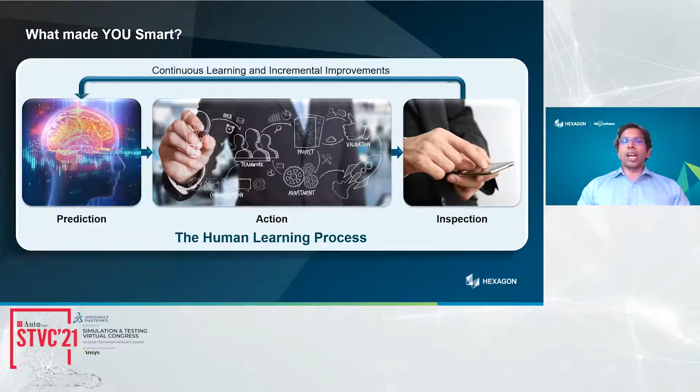Once you predict, that's when you act - that's when you actually serve. Once you serve, you inspect what has been done and make sure it was perfect, or if any correction is needed. That's where your continuous learning and incremental improvements come in. That's the cognitive learning process for you.

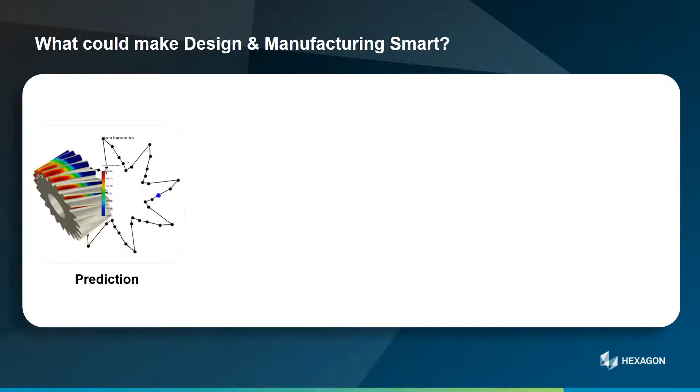So we asked ourselves if this process can be leveraged to improve products and processes. In designing various products, let's look at how we can apply this model. From a product design point of view, initially you would start with predicting - that's more on the design and simulation aspects. For this example of a gear, you would want to see if it's performing as needed functionally. So once you do the virtual simulations and make sure it is designed correctly, the next step is to manufacture it.

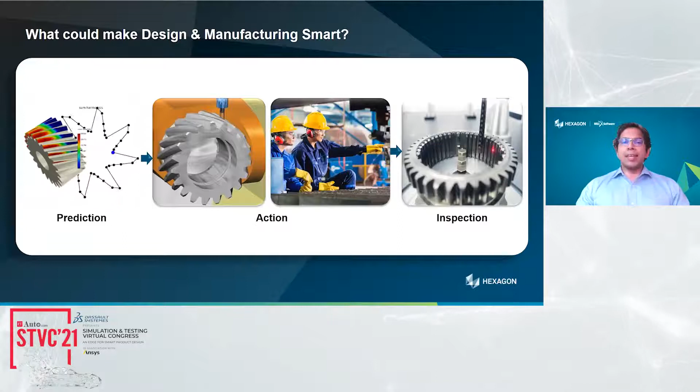That is the action part. Once this part is manufactured, you would want to inspect and make sure that the prediction is in line with what has been made. So that's where you compare, and the continuous learning and incremental improvements happen. That's called the cognitive engineering evolution.

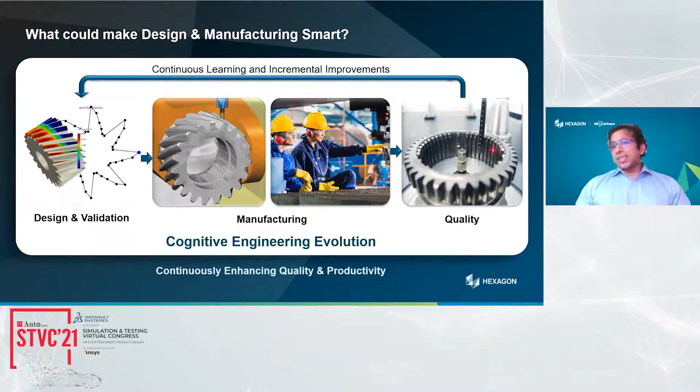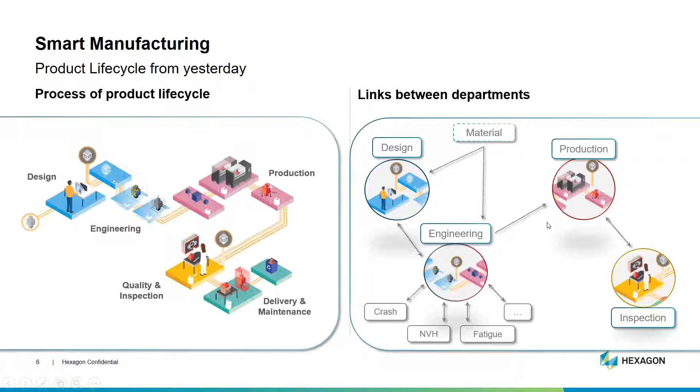So this is our model - this is what we try to apply to our engineering domain. If you look at smart manufacturing, how does the product life cycle of yesterday look like? Most functions operate in silos, like design, production, engineering, quality inspection, or delivery. Most are done in silos, and there isn't much of a digital thread or digital twins in play here. Maybe at max you have a design twin. Even the linkage between different departments is mostly siloed, or just between one or two groups.

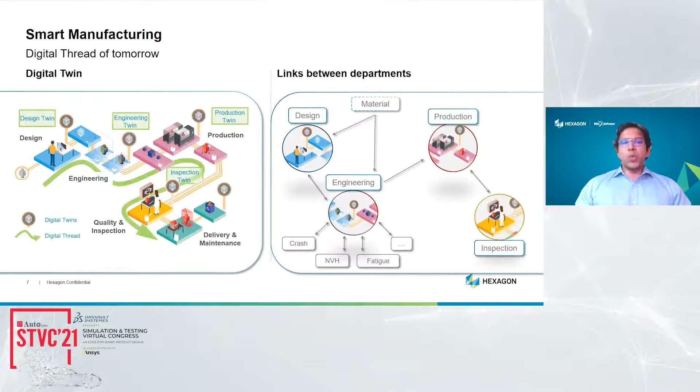But if you look at the digital thread of tomorrow, it's more like you have design twin, engineering twin, production twin, inspection twin, all connected through a digital thread. Similarly, the linkages between different departments are much stronger, where the right information is being exchanged between different groups at the right time.

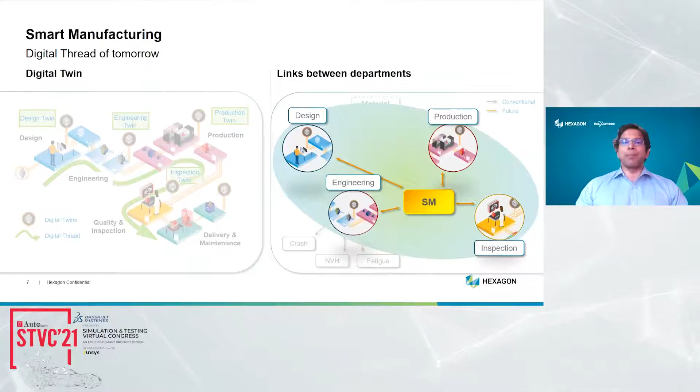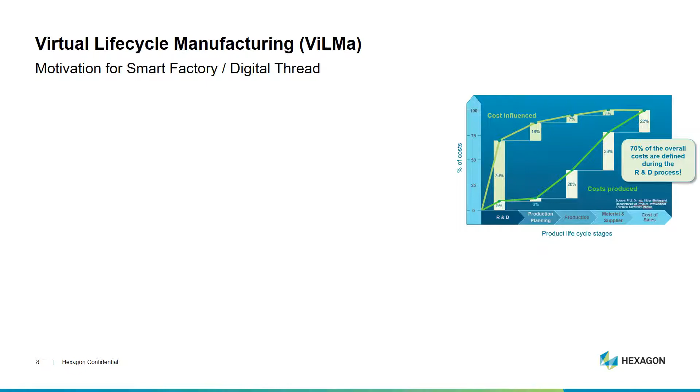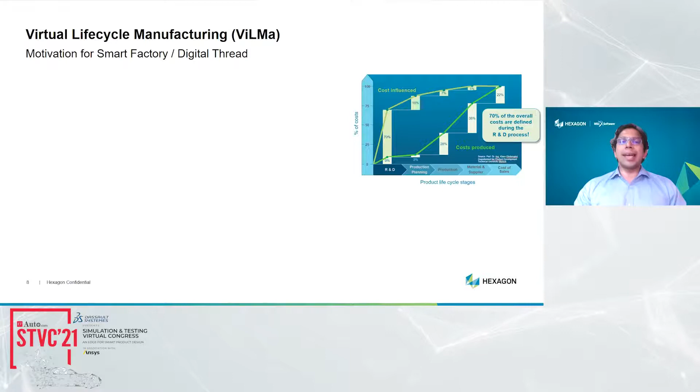That is where we talk about upfront simulation, or pushing the simulation upfront, but that's not good enough - we have done that enough. We want to improve the accuracy of information, or the content and quality of that information. That's where the virtual life cycle for manufacturing comes in.

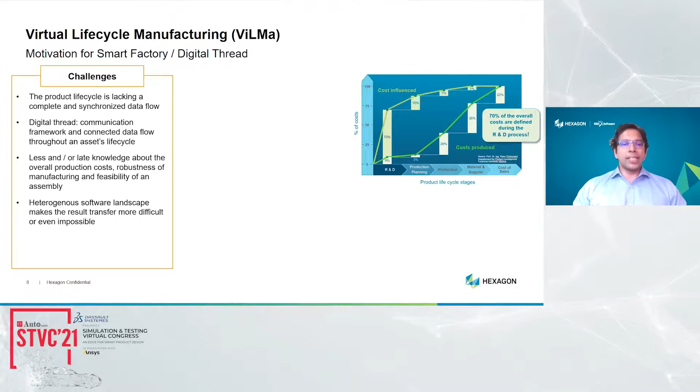So what are the current challenges of the current product life cycle? It lacks a complete and synchronized data flow. Digital thread is missing. There's less or late knowledge about overall production cost, robustness, and manufacturing feasibility of assemblies. Heterogeneous software landscapes make result transfer more difficult, and even impossible in some cases.

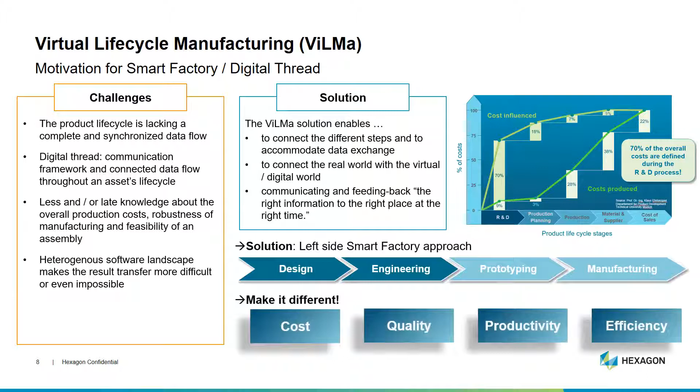That's where the solution we have comes in, which is called ViLMa, Virtual Lifecycle for Manufacturing. This enables you to connect the different steps and accommodate data exchange, to connect the real world with the virtual or digital world, communicating and feeding back the right information to the right place at the right time. And that's how we impact cost, quality, productivity, and efficiency.

Let's look at the framework of virtual lifecycle for manufacturing. The quality data management is the heart of this framework.

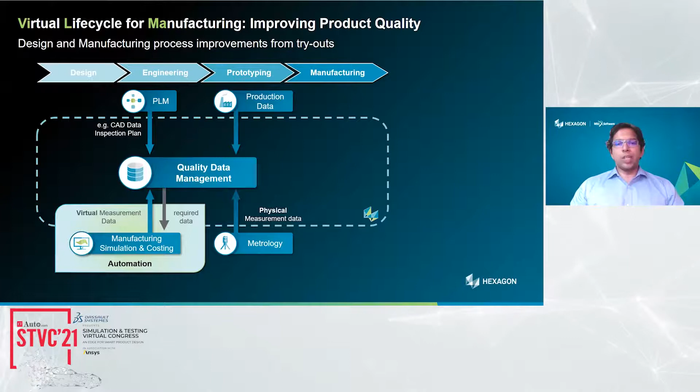All the info from PLM, production or process data, physical measurement data from metrology devices, and virtual measurement data are fed into the quality data management tool, where visualization and analytics are performed to compare virtual with physical and ensure corrective actions are taken and looped. This is the overall framework of ViLMa, or Virtual Lifecycle for Manufacturing.

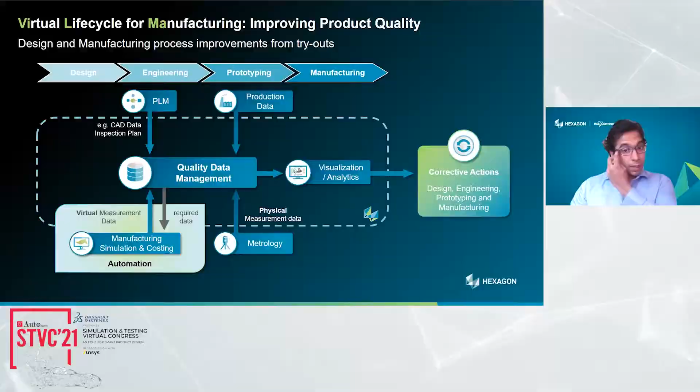Let us look at it from an assembly process point of view. We have our virtual assembly Meisterbock, where PLM data, constraint information, clamping, measurement positions, metrology, physically measured data, and virtual data from the simulation world are fed in.

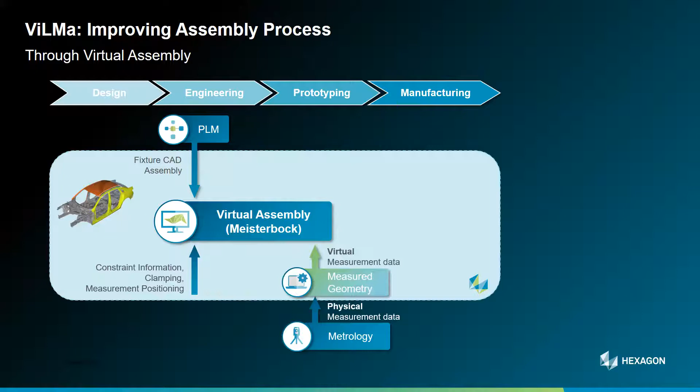Eventually, visualization and analytics are performed to determine if any corrective action needs to be taken based on the comparison between the physical and digital data.

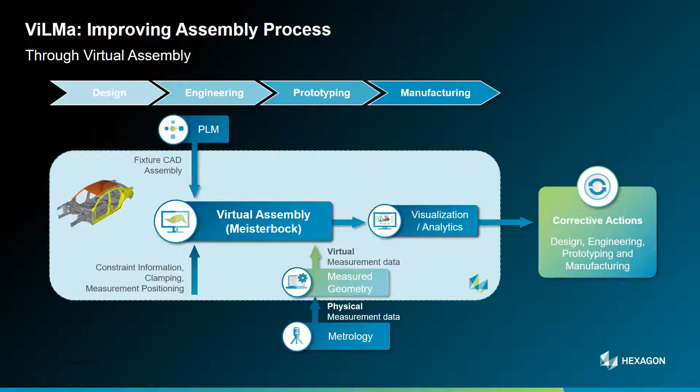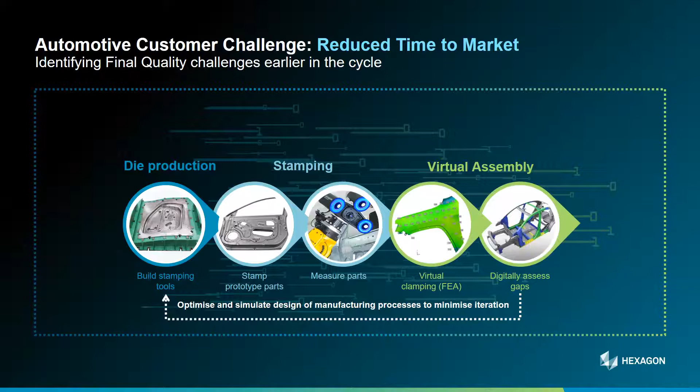The corrective actions are then performed. Let's get into a real life example of reducing time to market or identifying final quality challenges earlier in the cycle. Stamping tools are built, and then the part or prototype is stamped.

Once the part is prototyped, you use measuring devices or metrology devices to scan the whole part, and then you have a reverse engineering application based on which you come up with the CAD data.

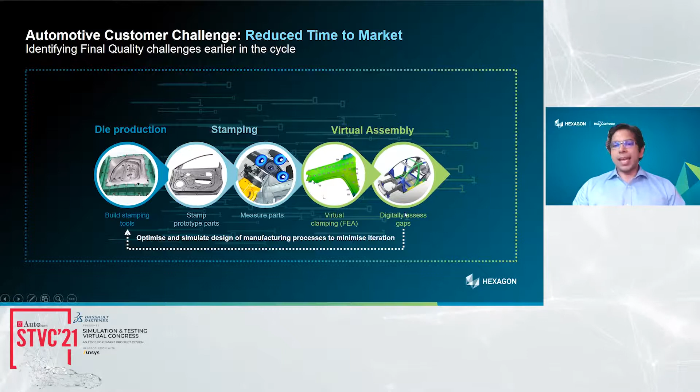This CAD data is then used for virtual clamping and welding, or other process applications, which is then assembled together to digitally assess gaps. Then it goes on a virtual loop of continuous corrections.

It's very important to consider process effects in our simulations. As you can see here, this is an example of spot welding of a particular part.

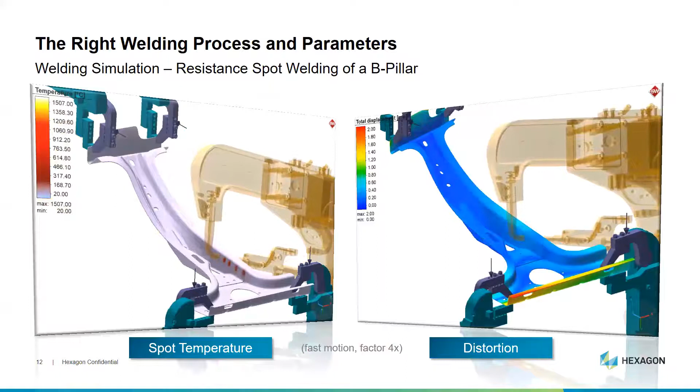Because of this, the distortion or residual stresses are considered in the next level of analysis, where distortion is considered for dimensional tolerance effects.

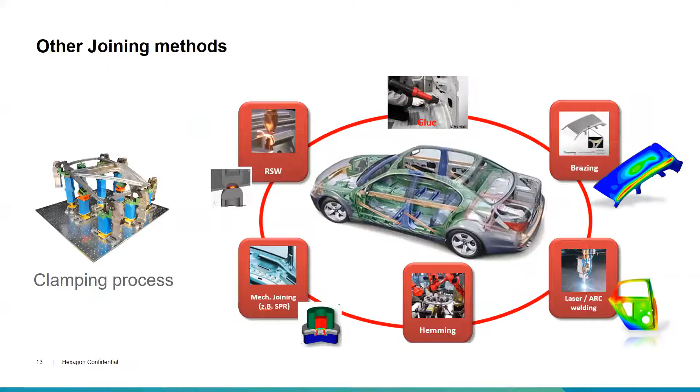It's not just limited to the welding process—any joining process can be virtually evaluated and then compared with the physical world.

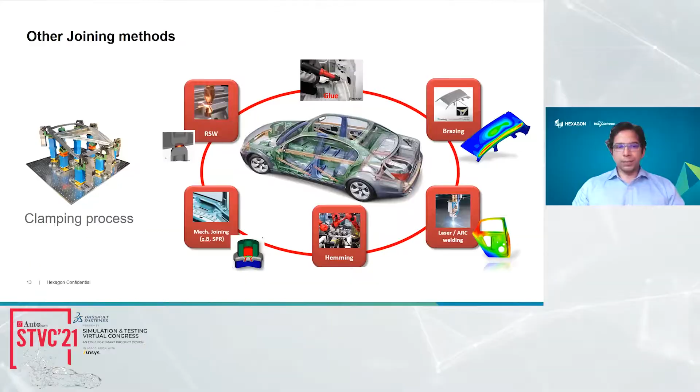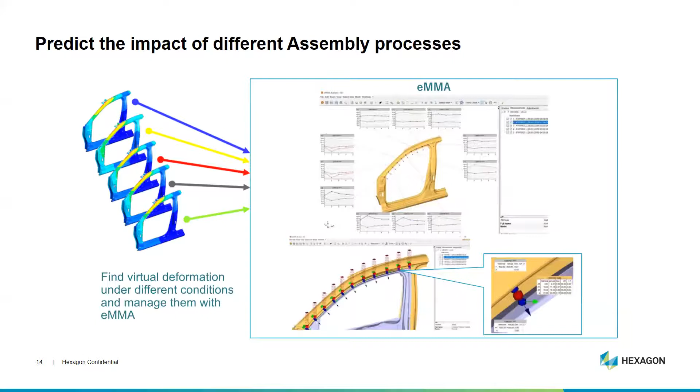Another important aspect is making sure process parameter variabilities are considered, and that the system is robust enough to handle dynamically varying process variables. Finally, you get it together in an assembly environment.

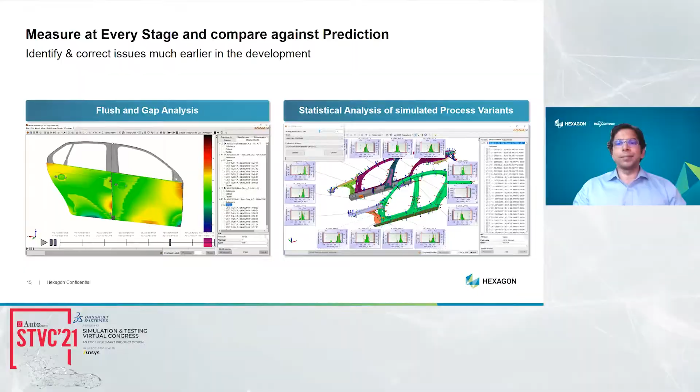This ensures good fit and finish to achieve the best perceived quality, and also to address functional defects or issues like buzz, squeak and rattling. Let's look into an iterative process at the full vehicle level where a subsystem is considered.

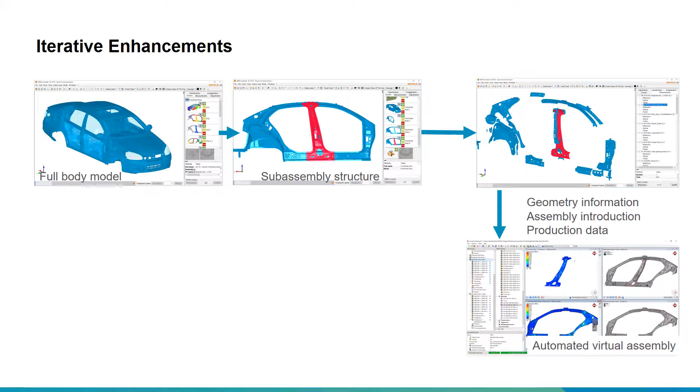You learn about how these parts are joined together using data from the PLM. This information and the process information are collected to put together into a virtual environment where you assemble these parts, or virtually manufacture and assemble them using simulation technologies.

This data is then compared with the physical measured data. Once the comparison is visualized, analytics are performed on the data, and you run continuously improving virtual loops.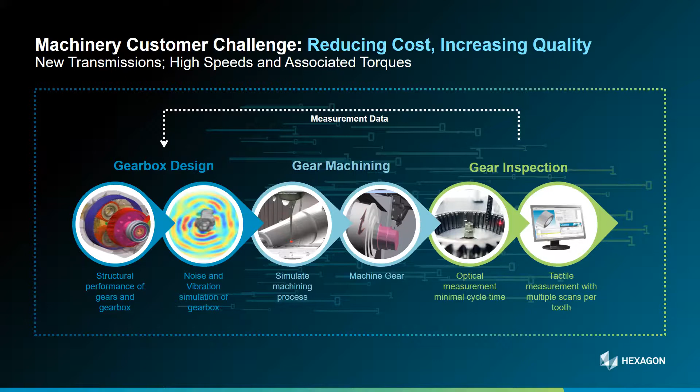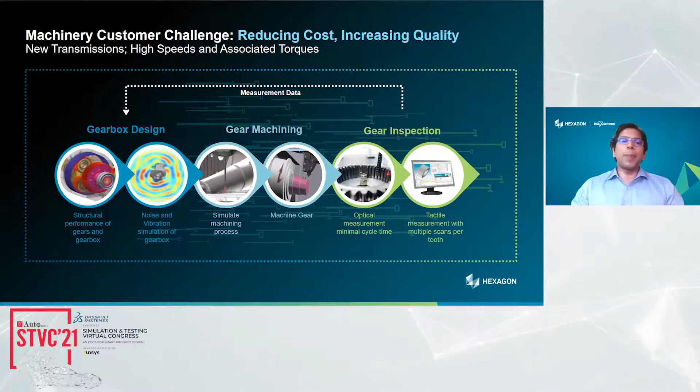Once the part is produced, various optical or tactile measurements happen, which are then compared again with the as-designed part, and any needed improvements are looked into.

To include any variations, even considering the latest manufacturing technology like additive manufacturing, the initial design and cost predictions are done at the initial stage, which is then passed on to design and manufacturing process simulations, done in the virtual environment.

Correlation with the scan data or computer tomography data is performed, and then feedback into the design and process optimization happens in a loop.

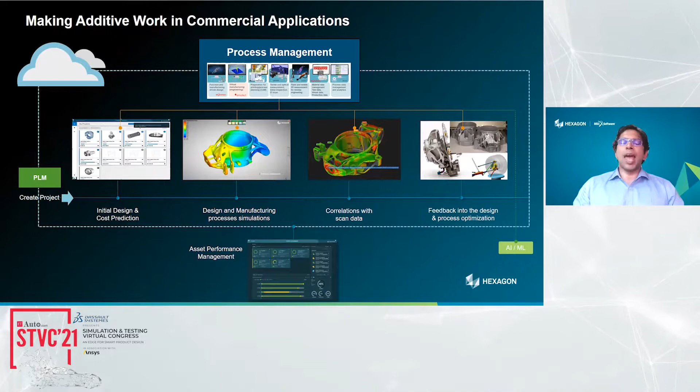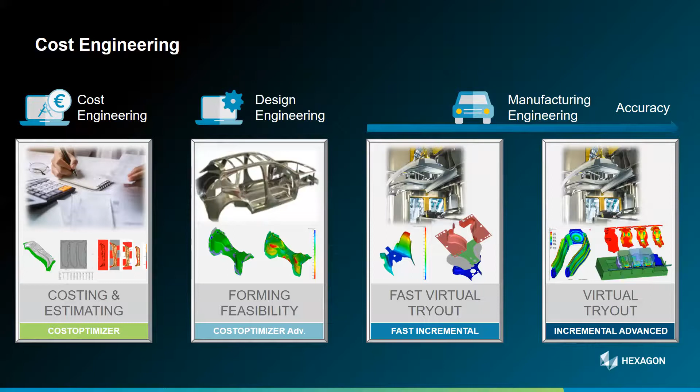Virtual lifecycle for manufacturing can be applied across various engineering disciplines like cost engineering, design engineering, and manufacturing engineering to improve efficiency and reduce cost.

Overall, this one platform helps you bring cost prediction, design and manufacturing process simulations, and correlation with scan data and feedback into design optimization all together, ensuring consistency, traceability, transparency of data, improved planning, and enhanced product quality.

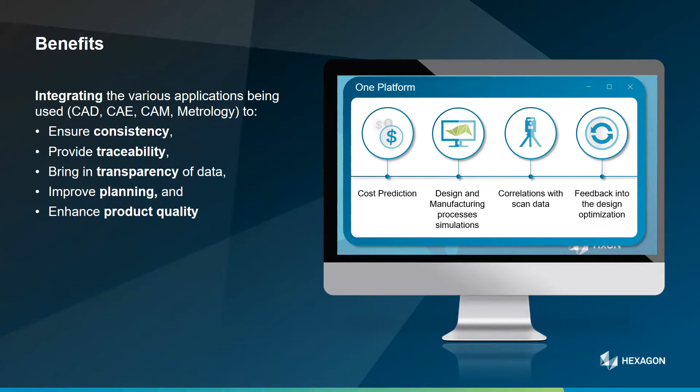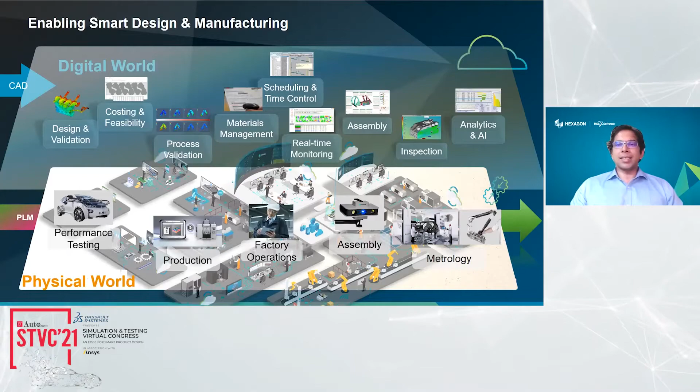As Hexagon MI, we strive to bring the physical world close to the digital world. That's been our aim. That's a quick intro to virtual lifecycle manufacturing.